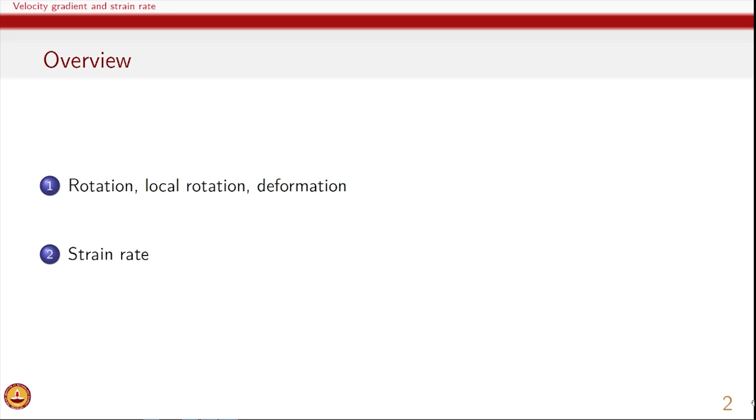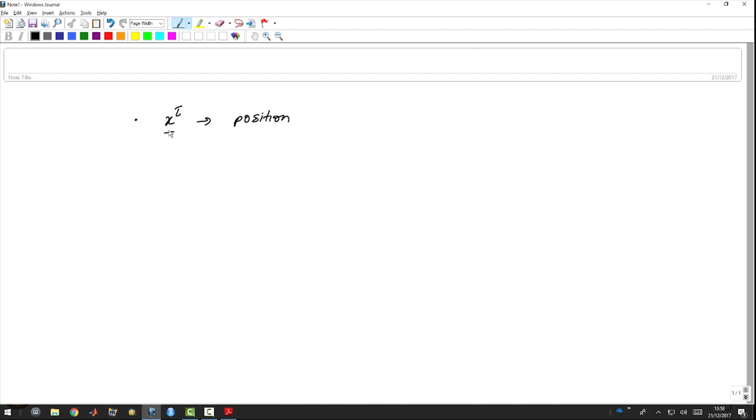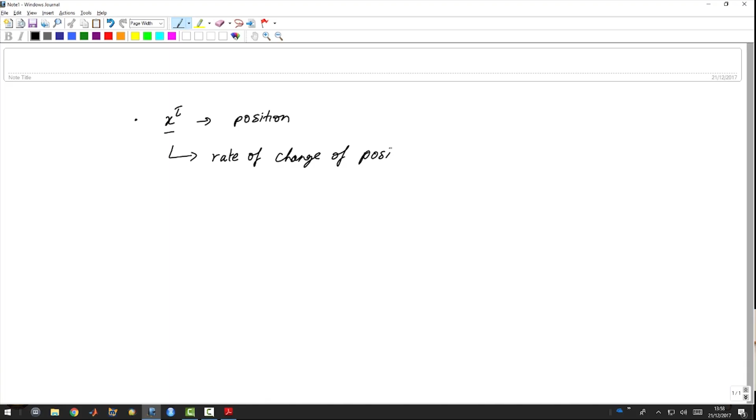So when you look at flow and rotation, what we have is an individual material point. Its position, as we have seen, is defined as x tau. So this is the position, and rate of change of this will give us the velocity. Rate of change of position is velocity. And so the velocity tells us about what is the overall direction of flow.

So if we, let's say, have a flow between two parallel plates, which we have discussed several times and we'll continue to discuss, if the top plate is moving and bottom plate is stationary, then material particles will be moving in the x direction, and therefore we will have velocity Vx. And only the x component of the particle changes.

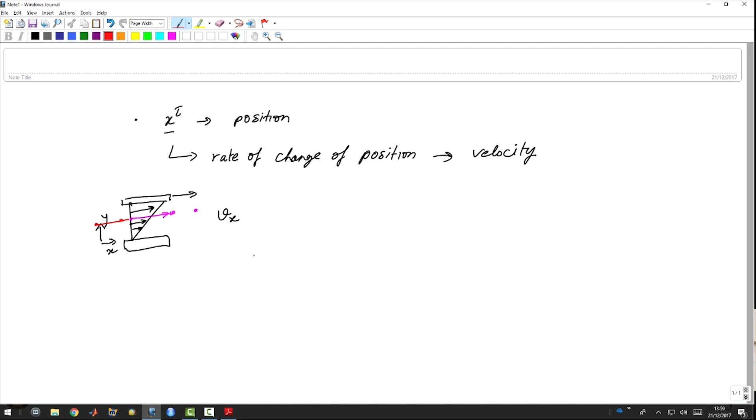And therefore if a material particle is here, with time it will continue to move like this, and after some time it may occupy here and here, and if you go some time in the past, then the same particle might have been here earlier. So there is only x direction motion. So in this case we can clearly see that the overall motion itself is not rotational. So the material particle itself is not rotating.

However, locally what happens? So if we take a very small portion of this and then zoom in, and let's say I put a small object like this in the flow. What happens is the top end has slightly higher velocity than the bottom end. And of course this overall object will move just the way these material particles move. So we saw that the material particle was here and then it moved here, or in the past it was in some other two locations. So there is a motion, so therefore this green object will also move.

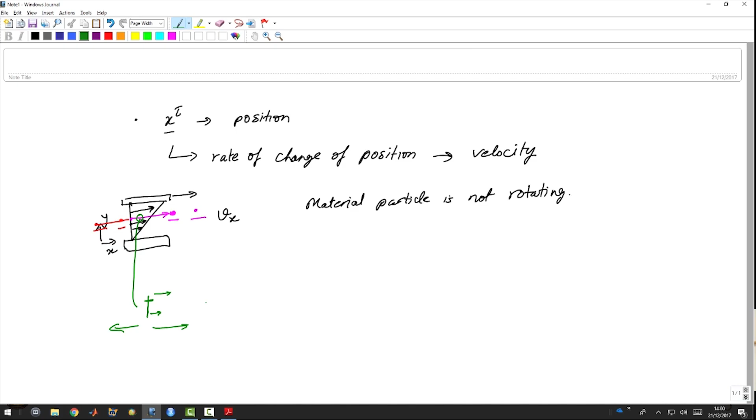So with some time it will move towards the right, and in the past it was towards the left. But you can see that with this small object, the top end of it has a higher velocity. So therefore this object will have a tendency to tumble; there is a local rotation in this flow. So overall we can see that the material particle is not moving in a rotating motion, because there is only Vx. But locally every neighboring set of elements is experiencing local rotation.

This local rotation is also related to curl of velocity. And if you remember, curl of velocity will have terms like del Vx by del y. And in this case, we know Vx is a function of y. So del Vx by del y is non-zero. So therefore, local rotation, which is related to curl of velocity, is also non-zero.

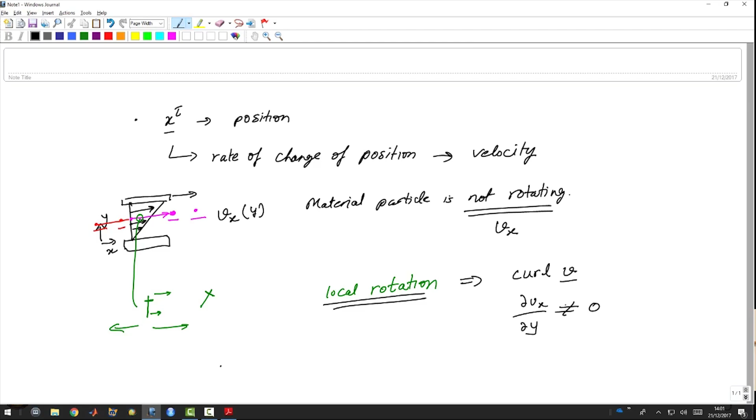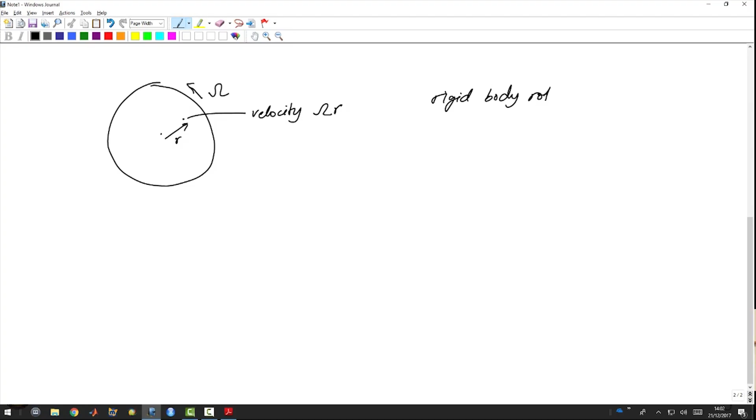We can also look at another situation where there is a rotation. In this case, we have, let's say, a disk, and this disk itself is rotating. And if the rotation rate is omega, then we know anywhere if the distance is r, the velocity is omega r. So this is called a rigid body rotation. So in this case, the material particle keeps on rotating, and so there is an overall rotational motion of a material particle.

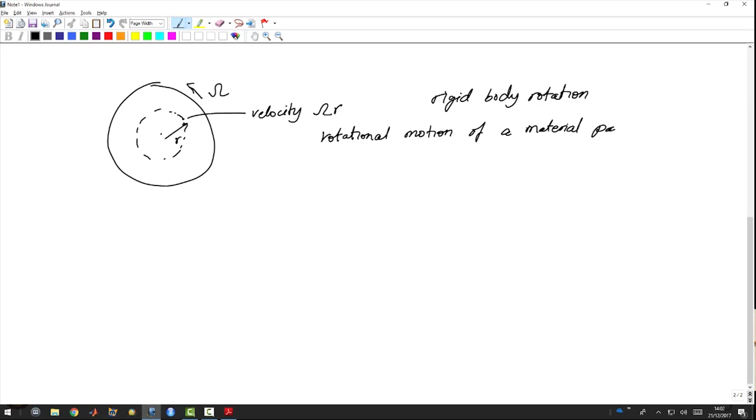But if I, let's say, embed an object at any given location, like last time, we embed a small green object here. What will happen is this object will rotate and it will really tumble in its place. And this can be seen also, where basically, let's assume that we have a small clip which can be embedded. So therefore it's embedded like this in this disk.

And if we rotate it, and this is rigid body rotation because the disk is rotating, you can see that the clip itself is rotating, and it is acquiring different orientations. Given that this velocity is higher than this velocity because this radius is larger, this end moves a little more compared to this end, and in the end the clip is rotating like a rigid body. There is local tumbling in this case.

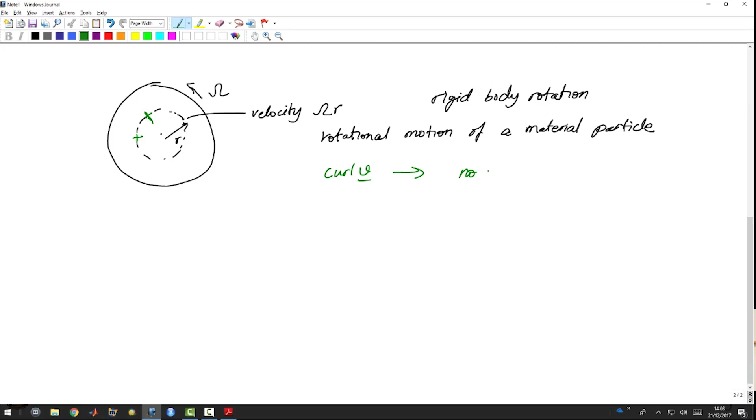But because of the rigid body rotation, the overall curl of velocity in this case will also be non-zero. So we do have local rotation in this case, because the object itself is rotating. We can also look at another type of flow. So this flow is basically v theta equals omega r, because there is only theta direction velocity.

We can also look at another type of flow which is v theta equals another constant by r. So in this case velocity is very small when you go to higher r, and velocity is very high when you go near the origin. So in this case also velocity is only in the theta direction, but the velocity keeps on changing with r. So if I again put the same kind of an object here,

now you can see that the velocity at this point will be larger and velocity at this point will be smaller. In this case we had velocity at this point larger and velocity at this point smaller. So in the rigid body case the local rotation was present. Now in this case what happens is we will have curl of velocity to be 0, and therefore local rotation will be absent.

So what we see is the rotational motion of the material particle is still the same. So in this case also we have rotational motion of a material particle. Here also we have rotational motion of material particle, because in both cases we have v theta. So therefore the material particle in general is moving in a rotational way, but the local object itself is not really rotating.

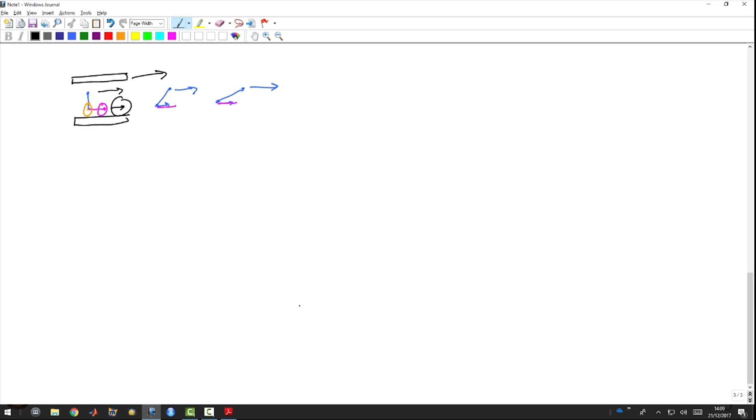Similarly, the other material fiber will remain exactly the same because both the points, the point here and the point here, are moving at the same velocity which is given by this. So therefore, based on the shape of this object, we can see that there is local rotation as well as deformation involved. This flow is called simple shear flow.

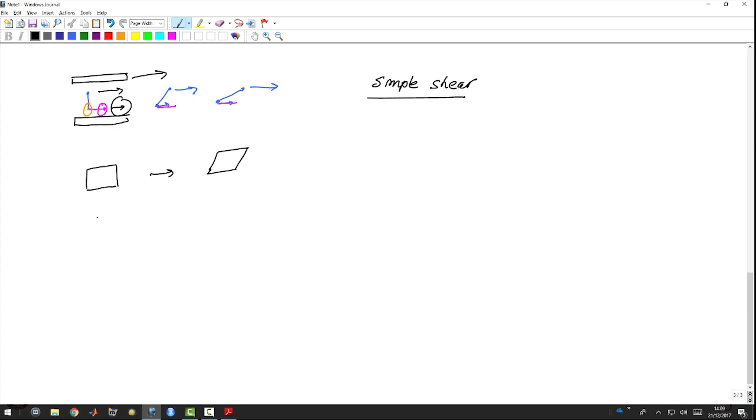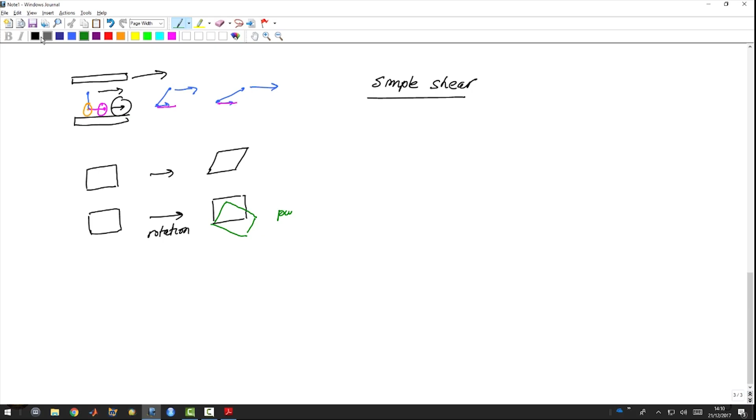And if I start with an object of rectangular kind, due to this deformation it becomes a rhomboid. Now, if we have a pure rotation, then this object after rotation would look something like this. So the block itself is rotating. So this is simple rotation. Rigid body rotation.

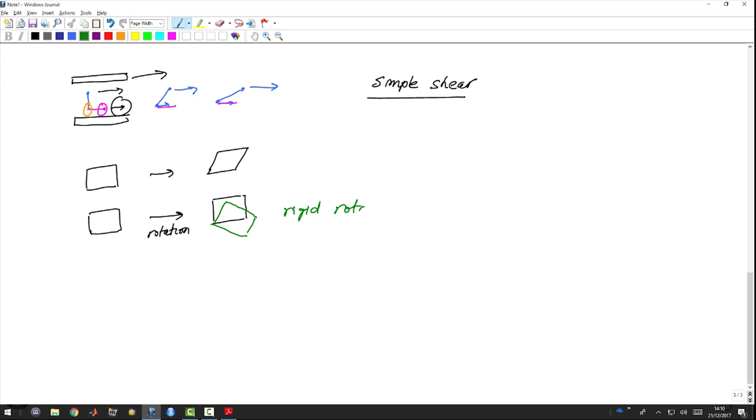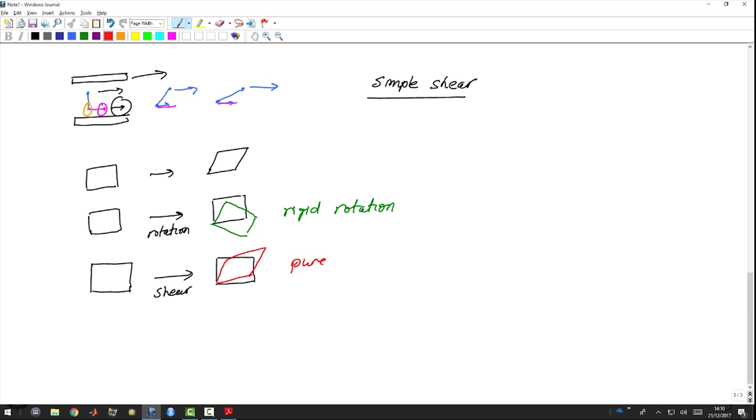We could also have a shear, in which case if it's the same block and it is getting sheared, then due to shear the same object will become deformed, and shear deformation will cause the block to become like this. So this is pure shear. Now if I add these two, then I get this.

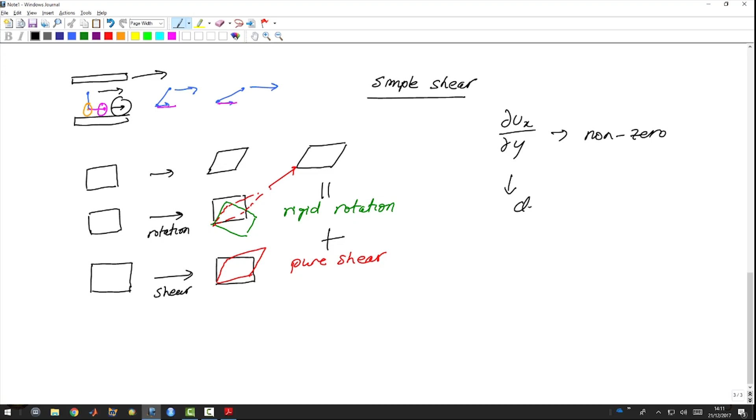So basically, if rotation is there, and on top of this rotation I impose a shear, then I will get simple shear. So this plus this together will give me the simple shear that we see. So in general, in all these cases, velocity between two neighboring points is what we are looking at. So in this case, when del Vx by del y is non-zero, this is related to deformation, and this is also related to local rotation.

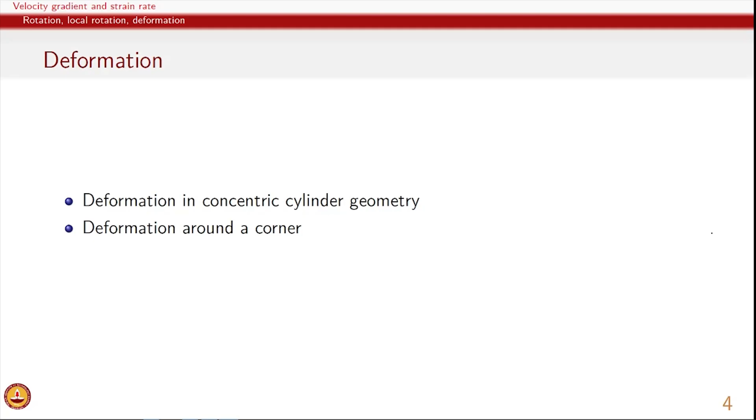So in general, the velocity gradient and its different components include information about deformation in the material, and for the course on rheology we would be interested in finding out the deformation and not local rotation. So let's look at an example geometry, which is concentric cylinder. We have an inner cylinder which rotates with certain velocity, and the outer cylinder which is kept fixed, and therefore the velocity would be something like this. So the velocity decreases and goes to 0 at the outer edge.

So in this case we only have v theta, and again del v theta by del r will indicate deformation and rotation. And to understand how we can obtain pure deformation and pure rotation information, we can again look at 3 points which are there in the neighborhood, and all of these 3 points are moving in theta direction because there is a v theta.

What we can see in such cases is that the relative velocity between these 2 points and between these 2 points will tell us whether there is rigid body rotation, whether there is deformation, whether there is any flow at all in terms of the 2 points having different flow. And to look at this in a little more detail, we can look at 3 different points. And this one, let's say, is v theta.

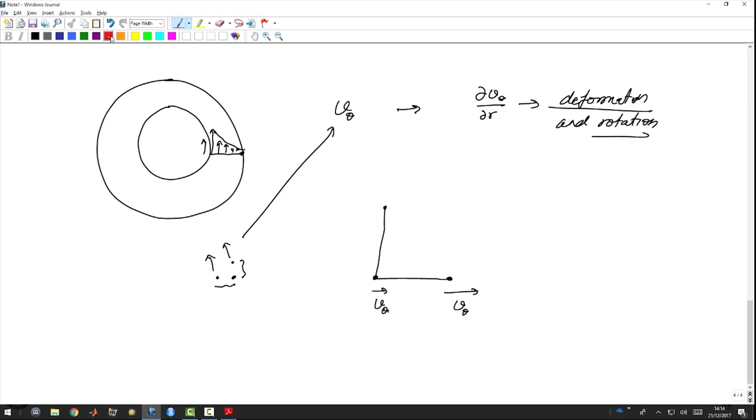And a little bit later, let's say the velocity changes, then this material fiber will keep on getting stretched. After some time this material particle would become stretched, because this v theta is small and this v theta is large, so the distance between them would keep on changing. So in this case, since this is the theta direction, del v theta by del theta will tell us about stretching.

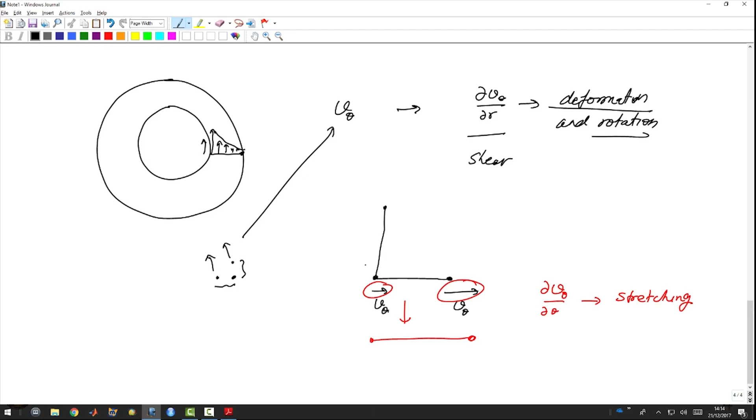We've already seen that del v theta by del r will tell us about shear. And rotational component will also be informed by del v theta by del r. If, let's say, in the same case we have Vr as the velocity, and here again Vr is velocity which is slightly higher, so again del Vr by del r will tell us about stretching. And similarly del Vr by del theta will tell us about deformation.

So what we can see is r theta, theta r. So the diagonal components will tell us about stretching, and the off diagonal components will tell us about deformation. And if we have a wire like this in the fluid, and with time this wire keeps on doing this kind of a motion, what we can clearly see is that this is a rigid body rotation.

So in this case the off diagonal elements are equal in magnitude and opposite in direction. So therefore del v theta by del r and 1 over r del Vr by del theta, these quantities will be similar but opposite in direction. So therefore subtraction of them will give us an idea about local rotation.

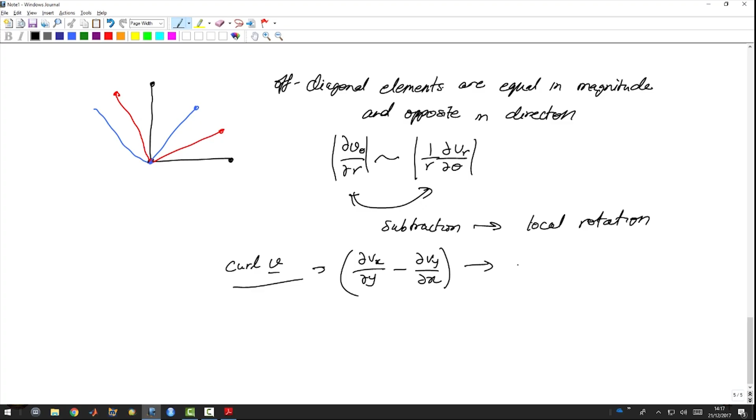This is not surprising if you just go back and think of curl of velocity and the components that we looked at earlier, del Vx by del y and del Vy by del x. Subtraction of this is the local rotation in z direction. So therefore terms like this will indicate rotation, and when you add the off diagonal terms,

if we have a fiber like this, this is nothing but pure shear deformation. Both of the material fibers are moving closer, and so this is nothing but shear deformation. So therefore, if they are equal and opposite, then addition of off diagonal terms will give us deformation. And so that is what we can see when we look at the velocity gradient.

The type of deformation that can be there in the material: of course it can move as a rigid body translation itself, in which case the velocity at each and every material point is identical, and therefore velocity gradient itself is 0. Then we have rigid body rotation, in which case the velocity gradient is not 0 because one point is moving at a faster rate compared to the other point, but the only thing we have is local rotation,

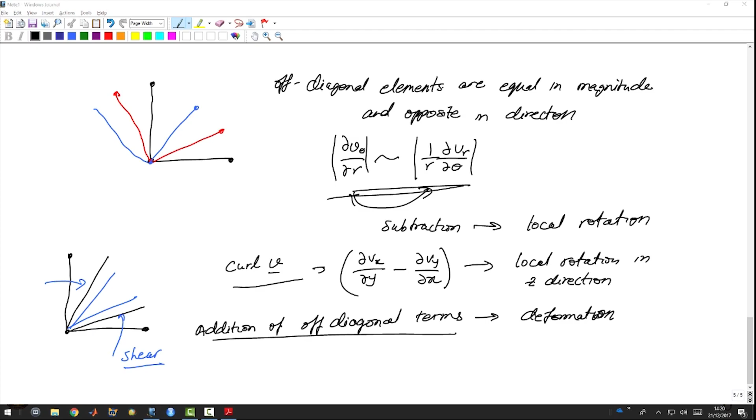If we look at, let's say, flow around a corner, we can see that somewhere very far away from the corner, if we have some surface like this and fluid is moving, and then suddenly there is a corner, so fluid will have to come and go like this.

So somewhere here velocity will be only Vx, because this is the y direction, this is the x direction, and the velocity will be a function of y only. So here Vx is only a function of y, and the only terms which will be non-zero are del Vx by del y. Terms like del Vx by del x or del Vy by del y will all be 0.

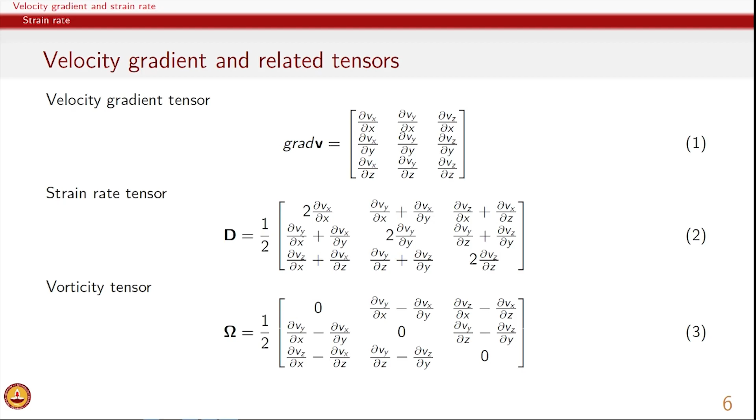But now once the material point comes here, you can see that at each and every point there is also going to be Vy and Vx, and not only that, its velocity will change as a function of position. Both Vx and Vy will change. So in this case we will have del Vx by del x, del Vx by del y. Since we are discussing a two-dimensional case, we will only have these 4 terms, and so we have del Vy by del x, and then del Vx by del y and del Vy by del y.

So all these will be non-zero here, and so for flow around a corner, we will have stretching and shearing and local rotation. So all are present. While in this case, which was simple shear flow, we have only shear and local rotation.

So in this course, our interest will be to impose some flows which are purely shear and some other flows which are purely extension. And of course, in practice, quite often in polymer processing or in applications of personal care products, the flows that these products will experience will be a combination of shear and extension flow.

And so the velocity gradient and its several components can also be seen for other coordinate systems. When we use the other coordinate systems, we have to be careful in terms of the additional terms which arise due to the curvilinear nature of the coordinate system. For example, we have here VR by R or V theta by R, and of course there is 1 over R because of dimensional consistency; in this case the element is R d theta and not d theta itself. The distance that is traveled in theta direction is R d theta. So therefore,

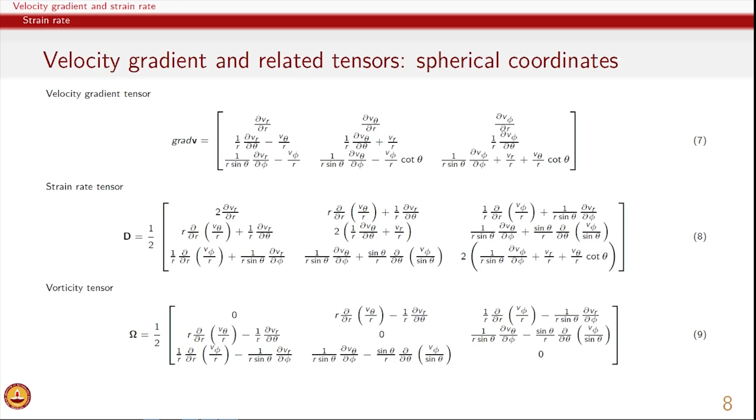But as far as stresses are concerned, stresses would be related to the rate of deformation, which is given by the strain rate tensor. So with this, we have reviewed the overall basic quantities, both kinetic and kinematic, which are required for us to do rheological analysis. In the next set of lectures, we will start looking at some specific examples of flows and how those flows are described in terms of position vector, in terms of strain rate, and in terms of other quantities of interest.